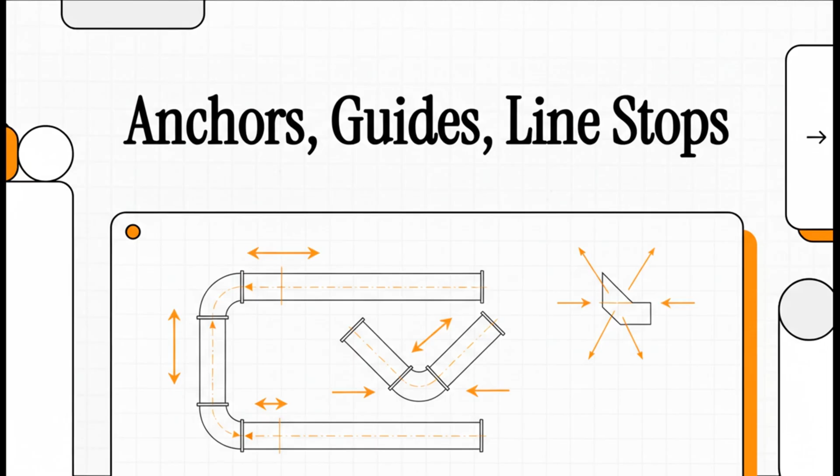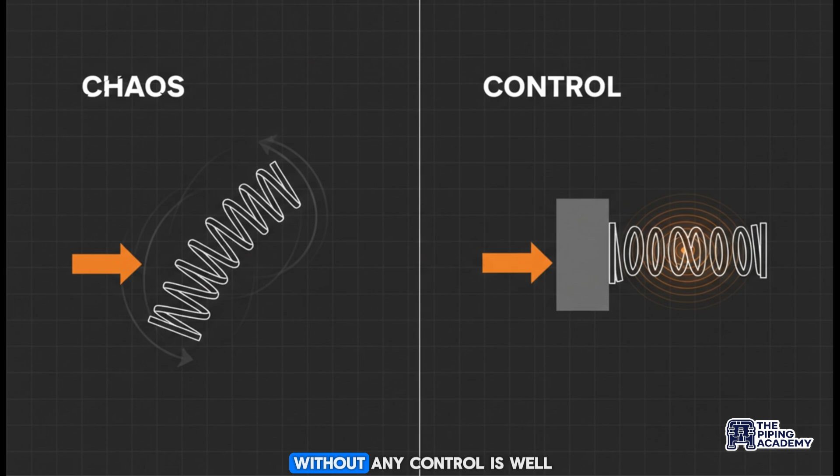But it turns out just having flexibility isn't the whole picture. Think about it like this: if you just push on a spring that's not held in place, what happens? Well, it just flops over, right? It doesn't actually compress and absorb any of that force. It's pretty useless. Flexibility without any control is just chaos.

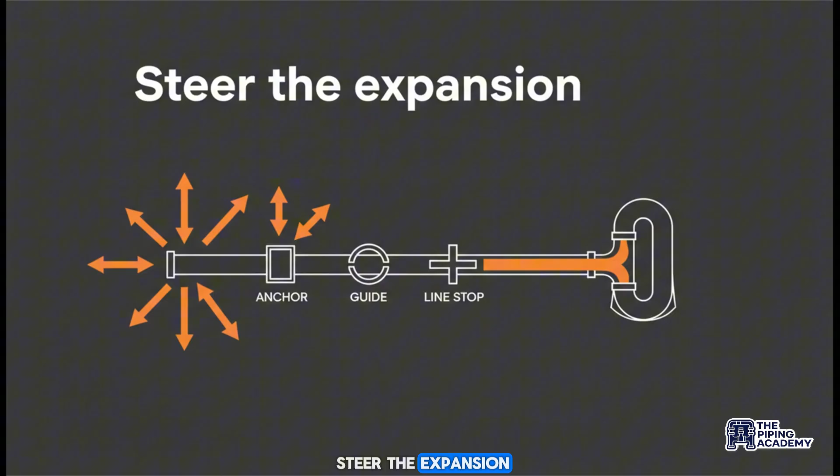So to make all that flexibility actually work for us, we've got to manage it. We have to steer the expansion. We need to tell the pipe exactly where it's allowed to go and where it's absolutely not. And this is where we bring in the real traffic controllers of the piping world: anchors, guides, and line stops.

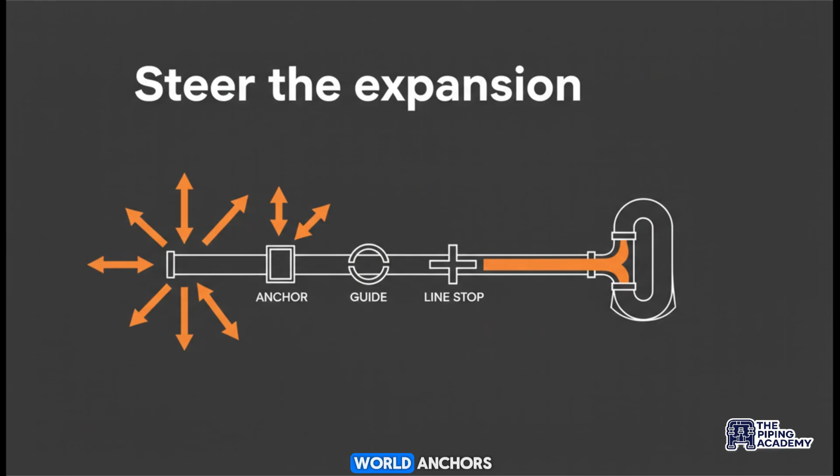In this explainer, we're going to start with why we even need to control pipe movement in the first place. Then we'll break down our three main tools: the anchor, which is our full stop restraint; the guide, which kind of directs the flow; and the line stop, for some really specific directional control. Then we'll wrap it all up with a quick summary. All right, let's jump in.

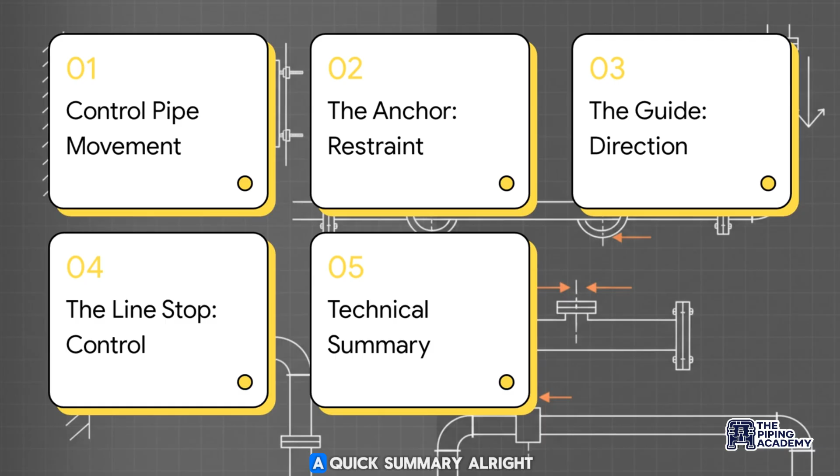Section 1: controlling pipe movement. Before we get into the how, let's really nail down the why. Why can't we just let these pipes move around however they want? A lot of designers starting out think a support's only job is to hold up the weight of the pipe. And yeah, that's called gravity support, and it's absolutely essential.

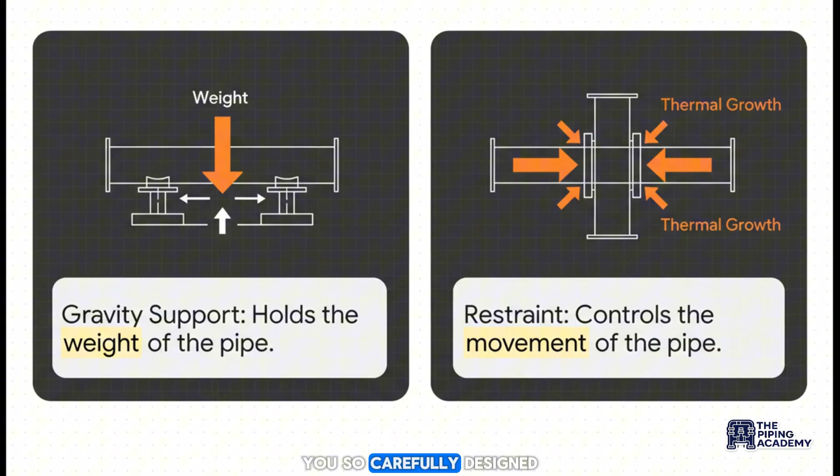But that's not what we're talking about today. Today is about restraint: actively controlling the pipe to force that thermal energy into the expansion loops you so carefully designed. So why do we need to restrain the pipe at all? What's the big deal if it just slides around on the steel beams as it heats up and cools down? Well, there are two really big reasons.

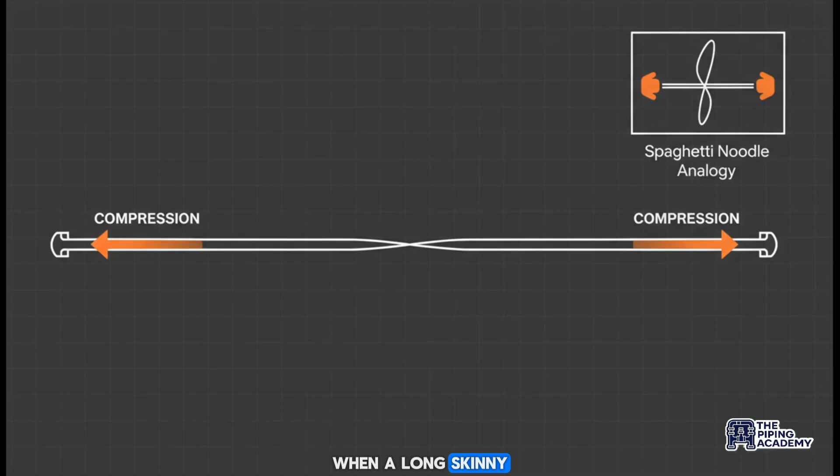First off, we've got to prevent what's called buckling. When a long, skinny pipe expands, it's actually in a state of compression. It's just like taking a dry piece of spaghetti and pushing on both ends. You know what happens next, right? It bows out to the side.

And in a packed pipe rack, that is a huge problem. A pipe that's buckling can easily fall off its support, or even worse, it could slam into a critical electrical tray or another pipe. This is exactly why we use restraints: to keep the pipe straight, stable, and totally predictable.

So let's move on to our first, and I'd say most powerful, tool for controlling that movement: the anchor. An anchor is pretty much what it sounds like: a completely fixed, immovable point. We rigidly connect the pipe to the structure. In engineering speak, we say it locks all 6 degrees of freedom. That means no moving side to side, no up and down, no forward or back, and definitely no twisting or rotating. It is a complete and total stop.

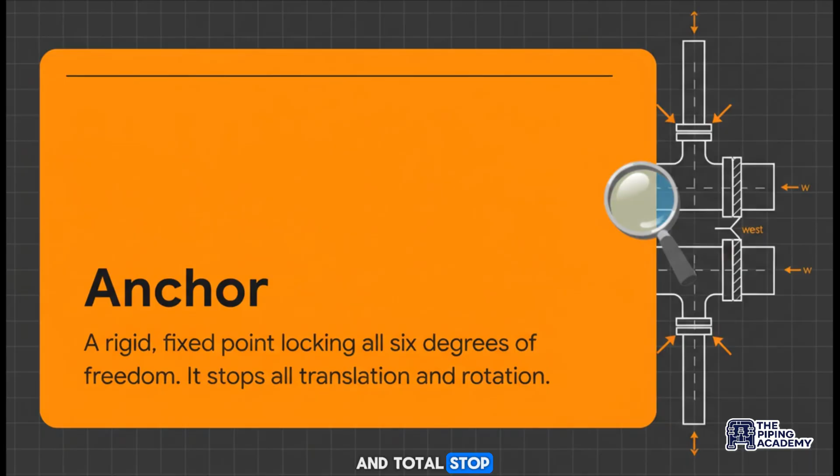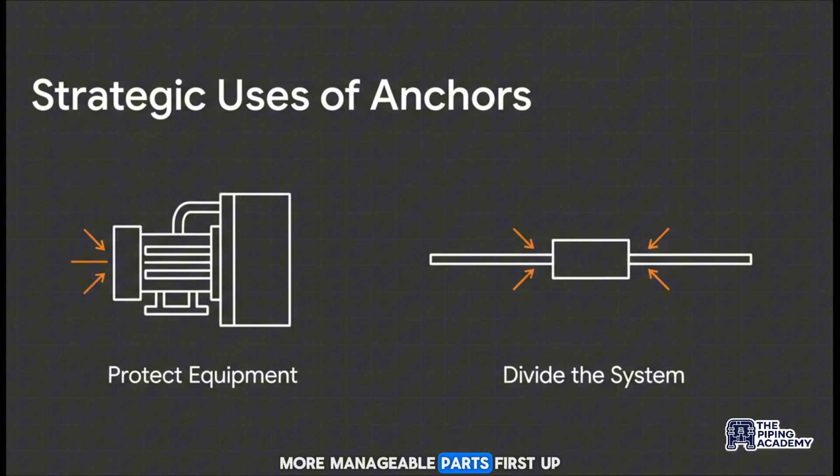And we use these really powerful restraints in a couple of strategic ways: first, to protect our equipment, and second, to divide a big system into smaller, more manageable parts. First up, protecting equipment. Just imagine you have a long run of really hot pipe and it's connected to a sensitive pump nozzle.

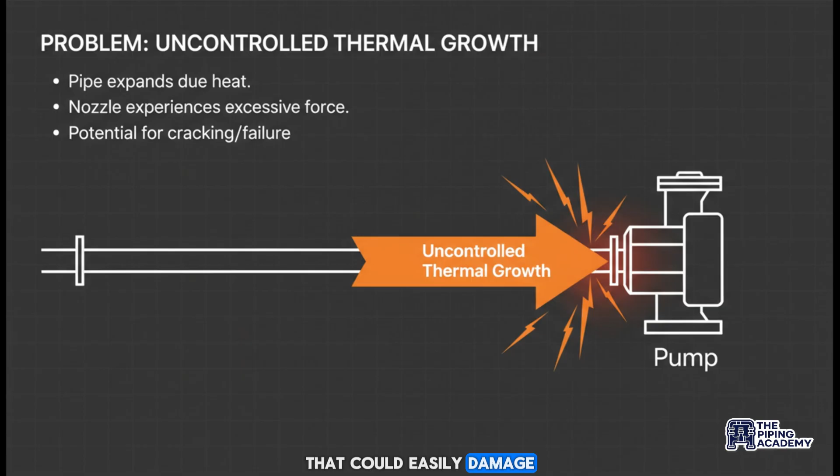If we just let that pipe slide around, all that thermal growth, all that movement is going to get pushed straight into the pump. That could easily damage it or even shove it right off its foundation. But if we place an anchor right near that nozzle, we completely isolate the pump from all that system movement. The anchor takes the full brunt of that expansion force, so the pump doesn't have to.

Now, the really crucial point here is that an anchor transfers massive forces into the structure, so you have to make sure it's placed on a beam or a foundation that's strong enough to take it.

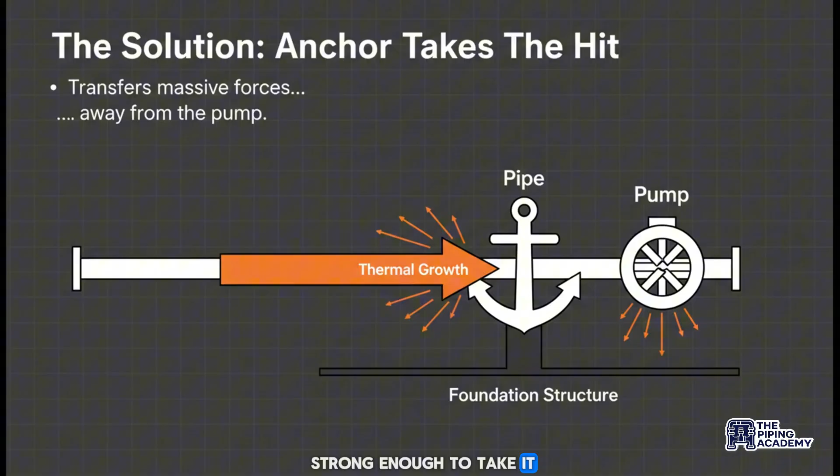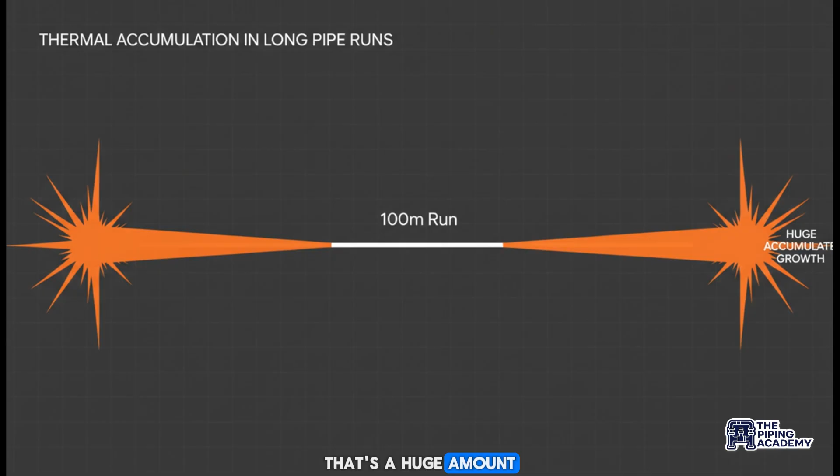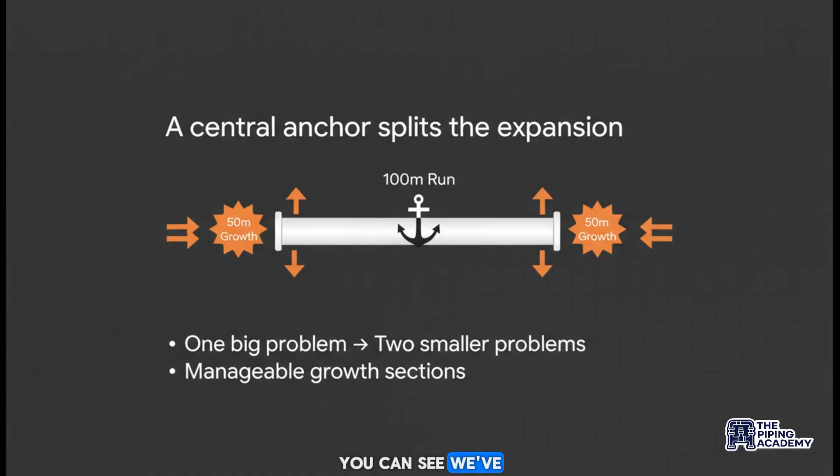The second key use is dividing up the system. Let's say we have a straight 100-meter run of pipe. If it expands by, say, 20 centimeters, that entire 20 centimeters of movement is going to show up at the ends. That's a huge amount of growth to try and manage. Here's the really elegant solution: by placing just one anchor right in the middle of the run, we force the pipe to expand outwards from that central point. We've literally cut the expansion at each end in half. We've taken one giant problem and very cleverly turned it into two much smaller, much more manageable ones.

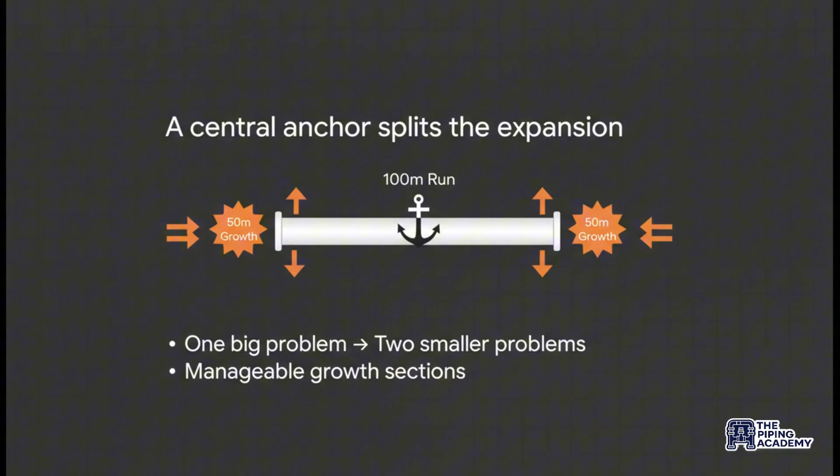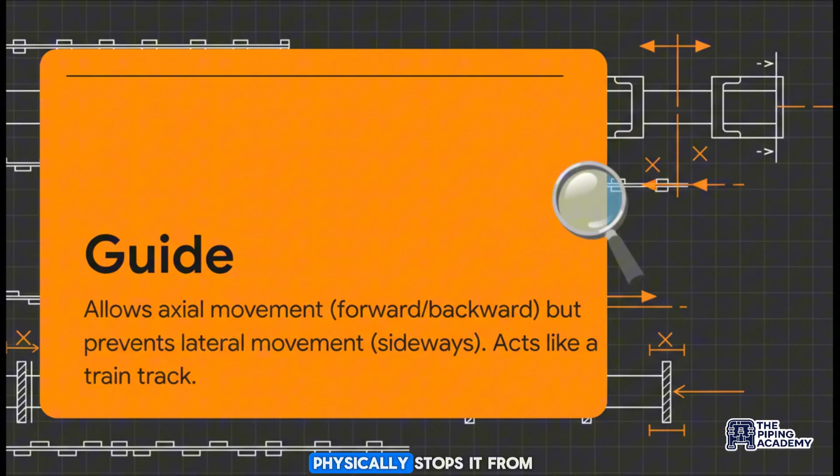Now, an anchor is kind of a blunt instrument. It's just a full stop. But sometimes we need a little more finesse. And that's where our next tool comes in: the guide. So while an anchor acts like a stop sign, a guide is more like a train track. A guide lets the pipe slide freely forward and backward, that's axially, but it physically stops it from moving sideways. It basically channels all that movement in one straight line.

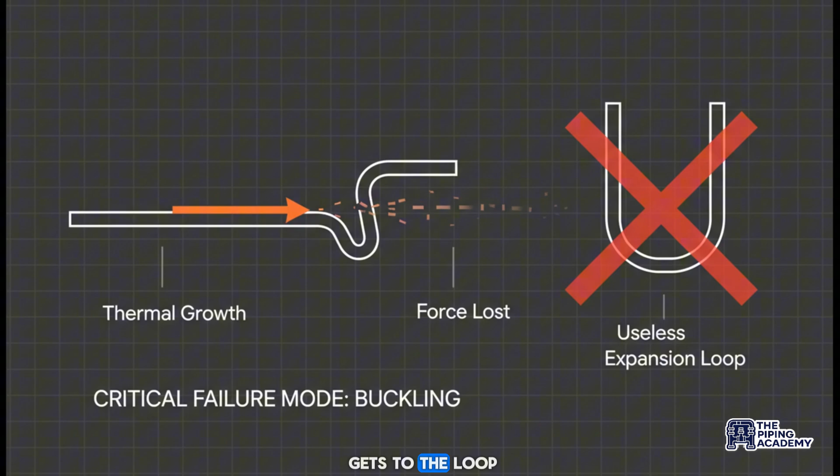This shows you exactly why guides are so important for expansion loops. Remember that U-shaped loop we designed to add flexibility? Well, that only works if the pipe actually moves straight into it. If the pipe buckles sideways before it even gets to the loop, then the loop is completely useless. That's why standard engineering practice tells us to place guides at very specific spots leading into an expansion loop. These guides stop the pipe from buckling, and they force that thermal growth to go right down the track and into the loop. It ensures the energy gets absorbed exactly where we planned. Trust me, if you leave out the guides, your pipe is going to snake all over the rack.

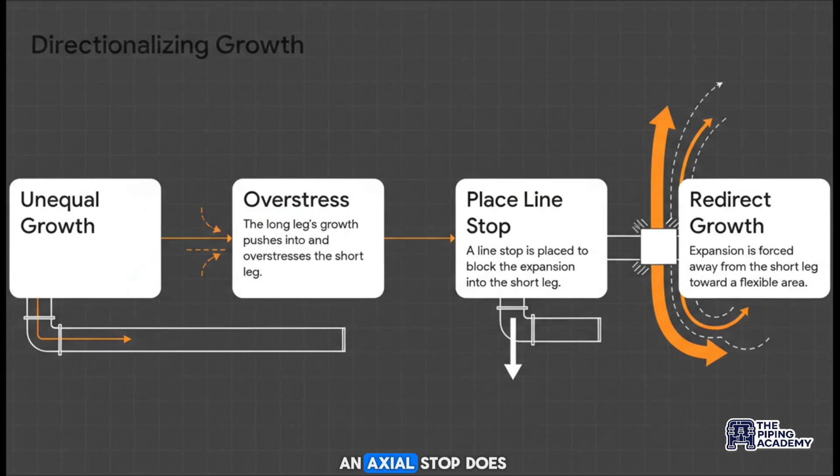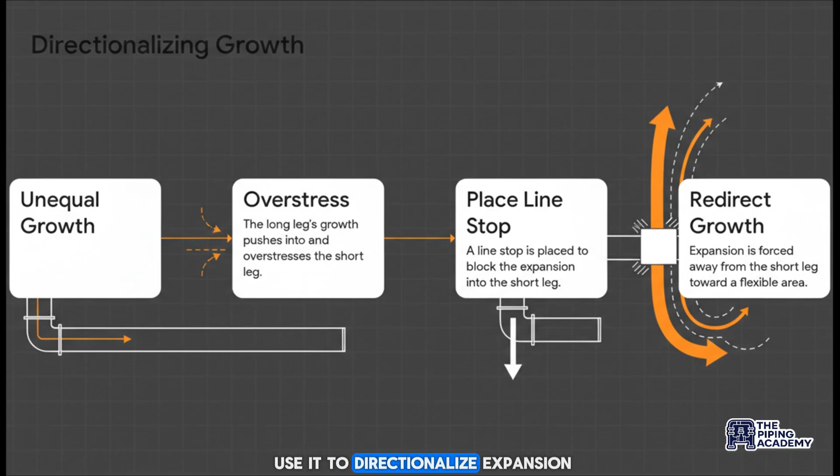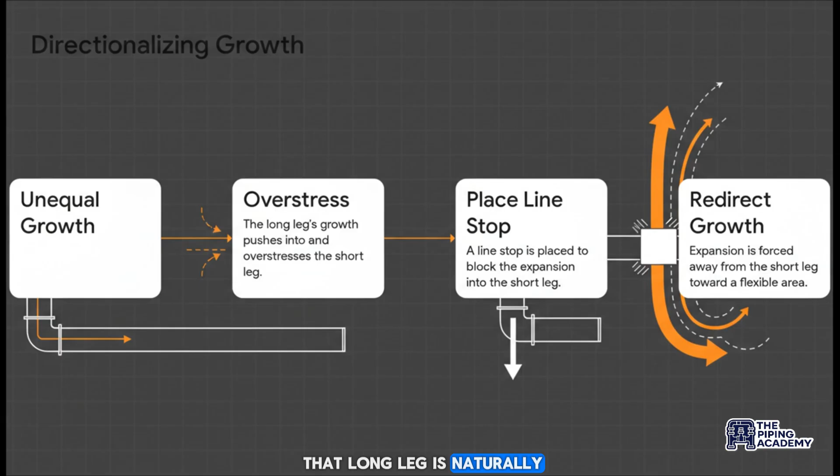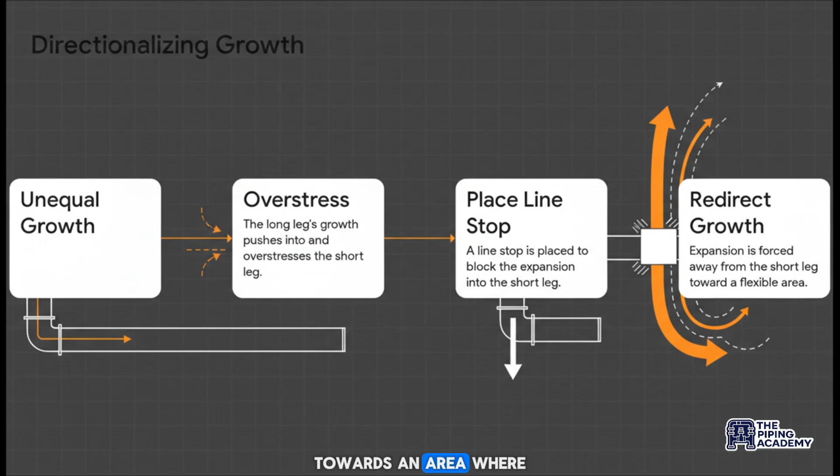And finally, let's have a look at our third tool. This one is a bit more specialized. It's called a line stop, and it's all about directional control. A line stop, or an axial stop, does the opposite of a guide. It stops the pipe from moving forward or backward, but it lets it move side to side, or up and down. So why would you use it? To directionalize expansion. Imagine you have an L-shaped pipe, where one leg is 50 meters long and the other is only 10. The massive growth from that long leg is naturally going to try to push into the short leg, and that could easily overstress it. So by placing a line stop, we can block that path and force all that expansion to go the other way, towards an area where we've built in more flexibility to handle it.

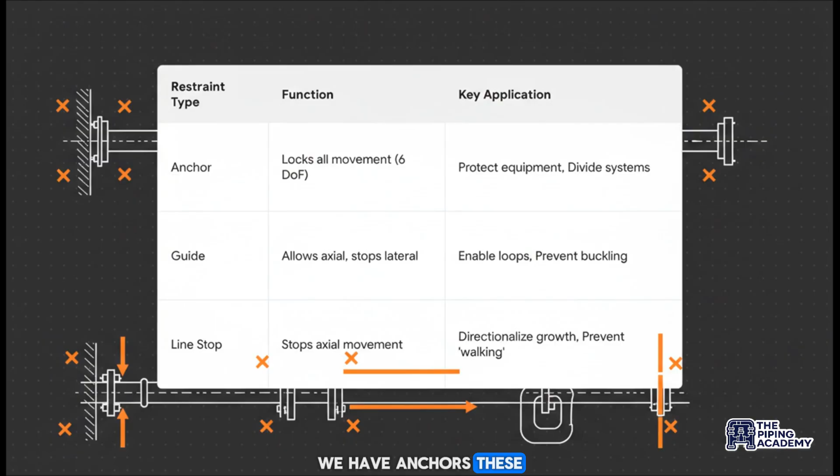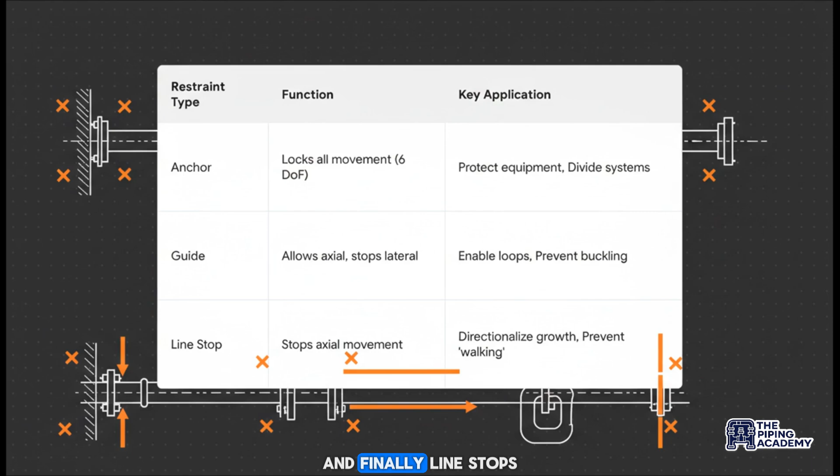Okay, that was a lot. Let's bring it all together with a quick technical summary. So to recap, we have anchors. These are our fixed points that lock all movement, and we use them to protect nozzles and to split up long pipe runs. Then we have guides. They stop sideways movement but allow the pipe to slide forward and back. They're like train tracks to prevent buckling and make sure our expansion loops work. And finally, line stops, which we use to push expansion in a very specific direction, making sure all that growth goes exactly where we want it to.

So now you know how to lock a pipe down, how to guide it, how to steer it, but we've kind of skipped over the most basic function of all, just holding the thing up against gravity. How far apart should supports actually be? Well, join us in the next explainer where we'll dive right into the philosophy of support spacing.